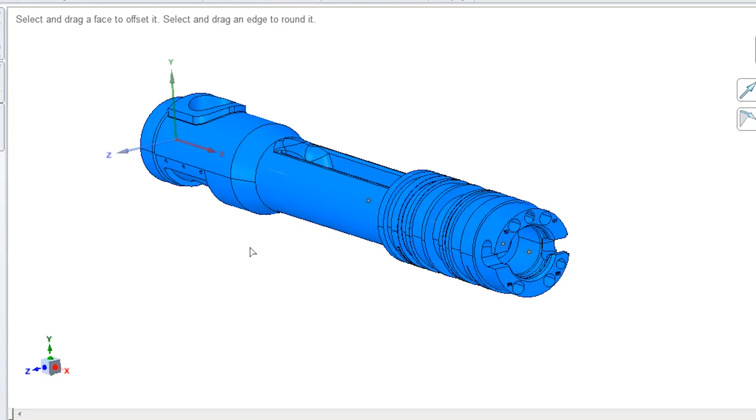So the blank right now looks like this. I'll turn the part off. And in this area over here is all filled with bronze, because this has a bronze overlay on this part, on this end of it, on this boss on the end of the part here. So we had to put that on there first before we do the rest of the machine work.

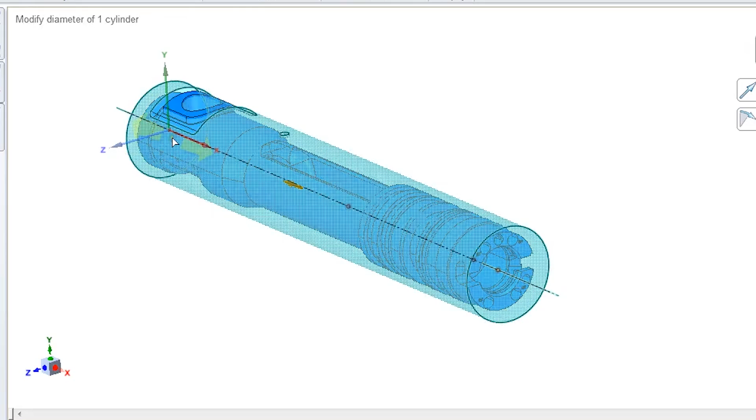And I put this little counterbore in here so that I can line up on the part so I don't lose my orientation to this overlay, because I'm going to start on this end first of the part, because this OD is my datum and I want to do that first.

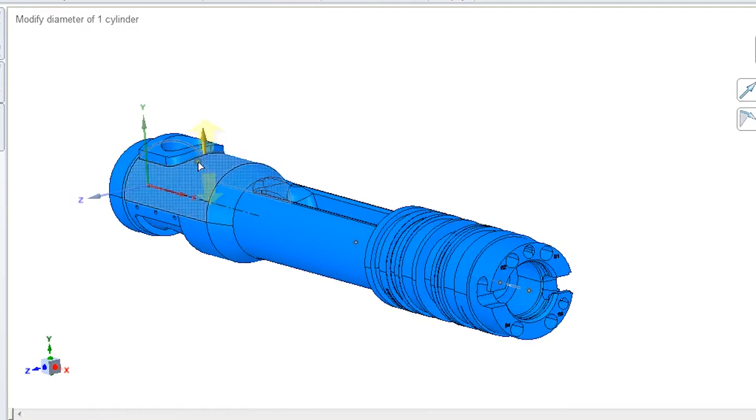But before we do that, this is going to be hanging pretty good ways out of the chuck jaws here, you can see. So we're probably going to skim this OD and get my steady rest on it, and then do all of this ID work up in here and these holes on the end of the part. And then we're going to make this plug that gets supported by the tailstock, and then we can turn all these OD features up here.

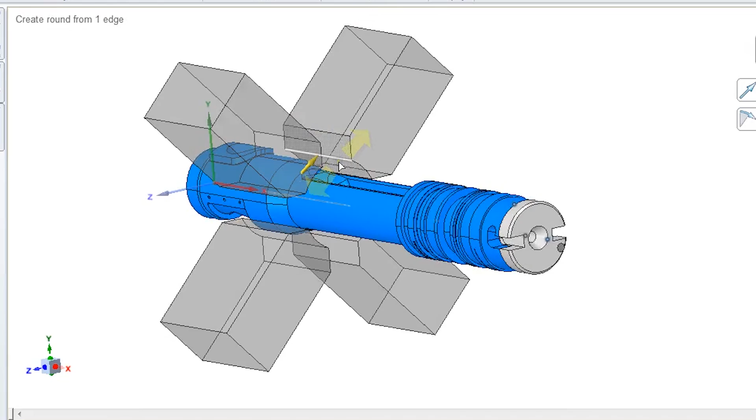I haven't decided whether I'm going to rough in some of this yet or not in this operation. So that's the operation, but like I said, this video is going to be for the most part about boring these chuck jaws and preparing them. And I cut away this area here in between the jaws so I can get my dial indicator on there and indicate the part, as well as for another reason that I explain later in the video.

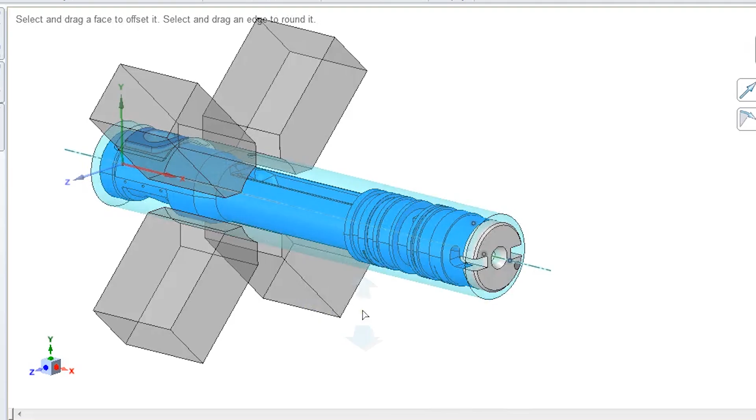And I also show a clip of the relationship between how the tailstock and the steady rest are going to be all the way up at the extreme of their travel towards the chuck, and that's another reason for this plug, so I can actually get the center on the part, because I'm really at the extreme travel of the tail center up here, and it might not reach. So that's also another reason for the end plug, as well as to be able to machine these J slots and everything on the part.

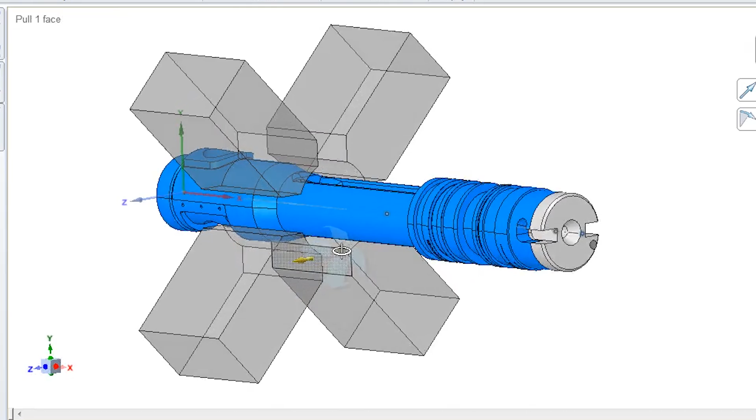Let me turn that weld prep here after I do the ID work first. So like I said, this video is just going to be about boring these jaws and getting ready and kind of getting an eye on where the steady rest and tailstock are going to land in order to do this part.

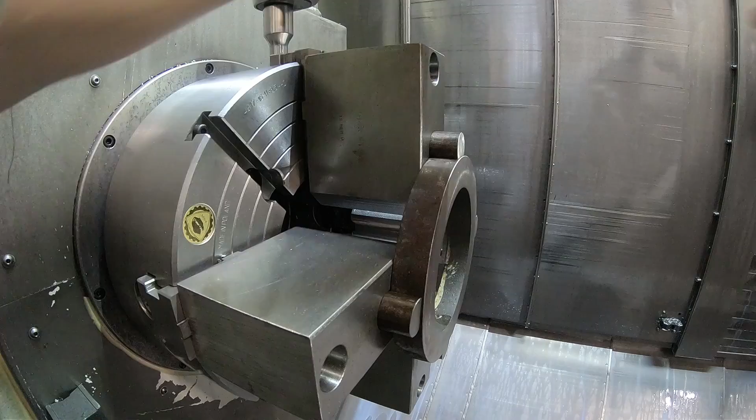The diameter a little bit smaller, so I cut some off these pins. Let me take one of the pins out. Now with a 4-jaw chuck, it isn't quite as critical that you get the bore exactly right on, because you're going to adjust the jaws. Let's see if I can do this. You're gonna adjust the jaws in all directions, so it's not so critical.

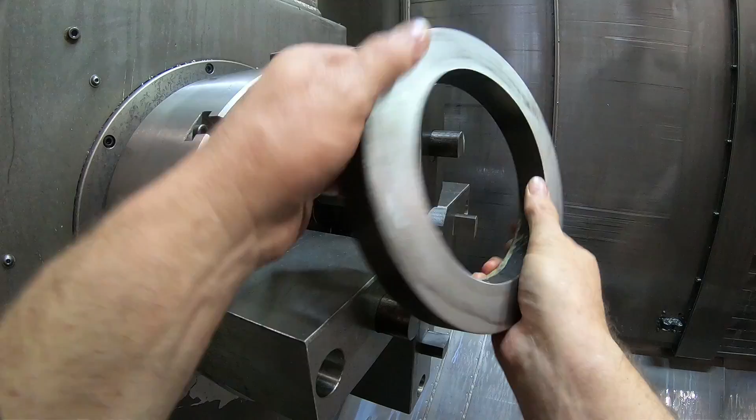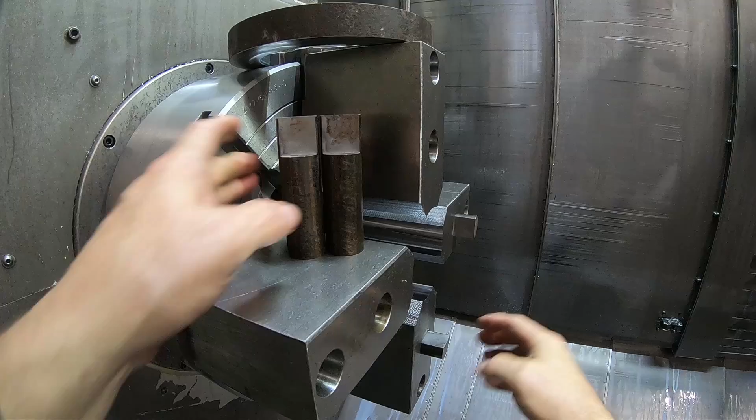This is just a piece of heavy wall pipe that I cut 1 inch off the end of, 1 inch long, and I needed to, like I say, reduce this diameter a little bit. So I machined each one of these pins that go in the jaws down a little bit so that I can reduce the diameter. So this is one way to bore chuck jaws that we use quite a bit.

Just stick pins in the holes, a nice close fitting pin in the hole. These happen to be 1.25" holes on these chuck jaws. So this is some 1.25" steel rod of some sort. I don't know, it was just a drop off the saw here. So I needed a 4-inch diameter here to grab my raw stock to start this job that I'm doing.

And I also milled these slots in here because I need to indicate something on the part between the jaws, and so I need kind of a gap here. Also, in a 4-jaw chuck, if the jaws wrap too far around the part, it's harder to indicate it in, because you can't push it sideways very easily. So this actually makes it easier to indicate the part.

But when boring jaws, this puts the force out on the ends of the jaws, so when you clamp them together, this is true of a 4-jaw or 3-jaw chuck or whatever, you put all of the clamping force out here towards the end of the jaw, and it springs the jaws back so that it more simulates when the part's clamped in there and all the play in the jaws is taken out.

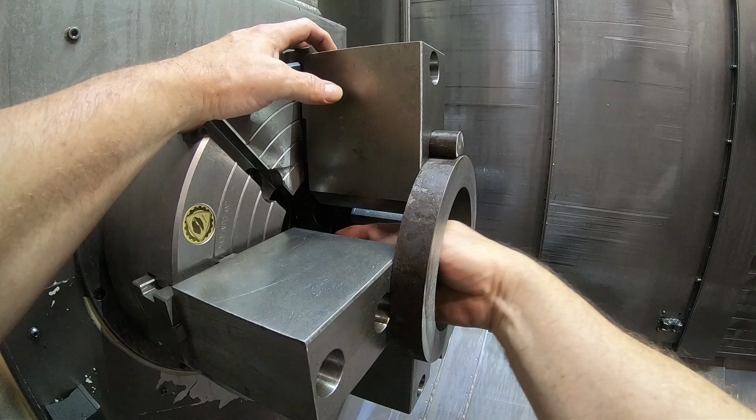Otherwise, if you just bored the jaws free here, you would only be clamping on the very back end of the jaws, and the front would be open because of the play in the master jaws, and the way the jaws bolt onto the master jaws can come into play as well. I've seen this on serrated chuck jaws like Kitagawa chucks, where it actually pulls the jaw away from the master jaw back here, particularly on tall jaws like this. These jaws are 4 3/4 inch tall, so it's even more exaggerated with taller jaws.